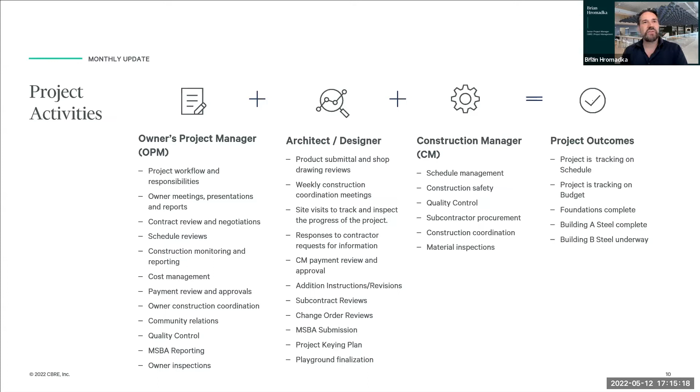We also have another MSBA submission that's being put together. That'll be the final one, so that'll be coming up pretty soon. And the CM is busy managing all the things on site, as well as a lot of material inspections lately. So together, we're able to make this thing go forward and keep the project on schedule and on budget.

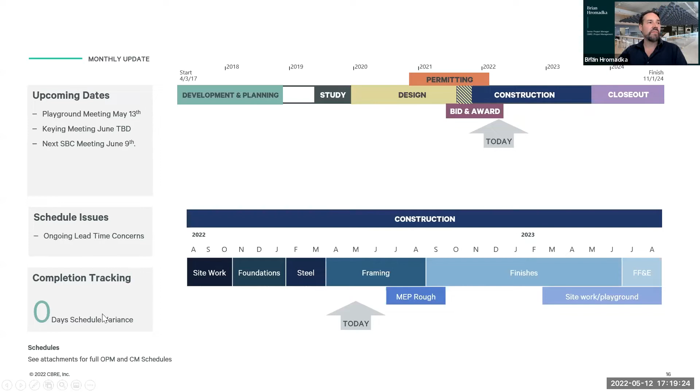So OPM, like I said, there's not really much new. We're going to continue to give you these summaries in the report because it's nice to be able to pass those on to other people as needed within the community. If someone has a question about what's going on, you can just hand over that whole report. But the OPM is basically working on the overall management, also communicating with the neighbors. There's some more communication that's been going out recently for some upcoming events, which we'll talk about in a little bit.

So we did have a concrete pour last month. That was, I believe, our second or third, but that also went off without a hitch. Notifications were sent out via email and flyers, and they're also being posted on the school's website, which I think is very helpful. You can see a banner on top. If you click on that banner, it'll give you the updates.

So within the next month, we're going to have a few more activities that people should be aware of. One of them is that temporary construction lights are going to be installed, probably the middle of this month, so here in the next week or so. This is necessary to provide the required lighting for the workers now that we have all the decking in and there's more finer work that needs to get done.

So OSHA has requirements for the amount of light that's necessary for the workers in order to be able to work safely. And then some of those lights will remain operational once work completes in order to keep the building secure and safe. But we have been able to work together with the contractors to reduce the amount of lighting during off hours.

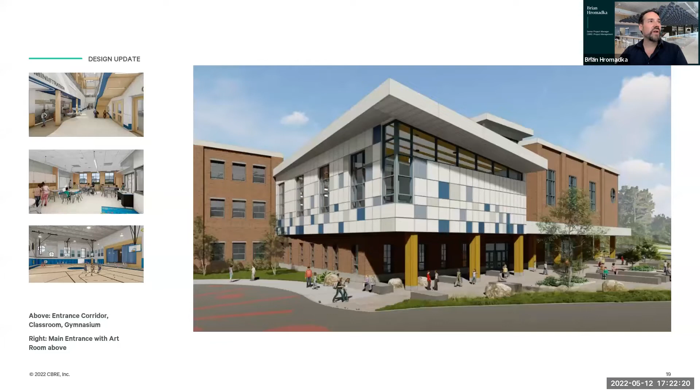Okay, moving on to our designer. The design team, as I mentioned, has been very busy with all the submittal reviews and also answering the RFIs. Brad was able to get away for a little R&R, which was very important because he's been burning the midnight oil, trying to get these turned around as quickly as possible to keep the project on schedule. And we have been able to kind of slowly catch up with the flow of new submittals and RFIs that are being put forth.

So before I move on here, I guess one thing I wanted to bring up is that we had a proprietary item for the safety glazing, and we have a substitution on that came from the contractor. I'm going to let Michelle talk about that a little bit more, but we did make a change there. It's not really going to affect the performance of the project, but I'll have Michelle explain why we made that change from the proprietary item that we had previously approved to the substitution.

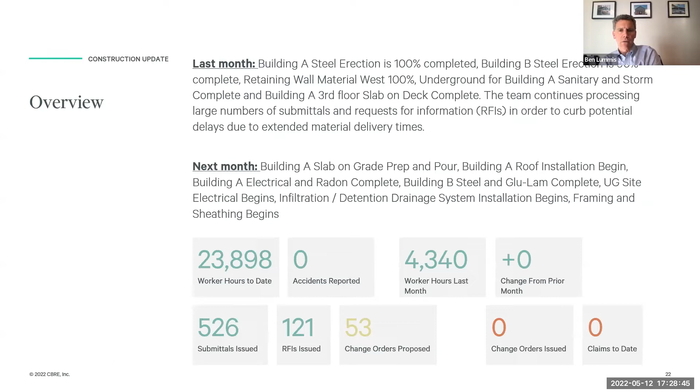Other questions about that switch for anybody? Okay, not seeing any. Thank you.

Okay, Amy is here, I believe. So we can go back to our votes. Sure, I'm sorry I'm going in and out. Can you hear me? Yes, we can hear you. All right, I'm going to mute so you don't hear me when I'm not speaking.

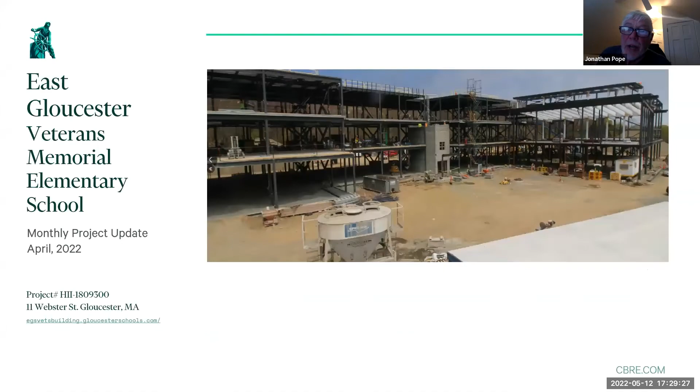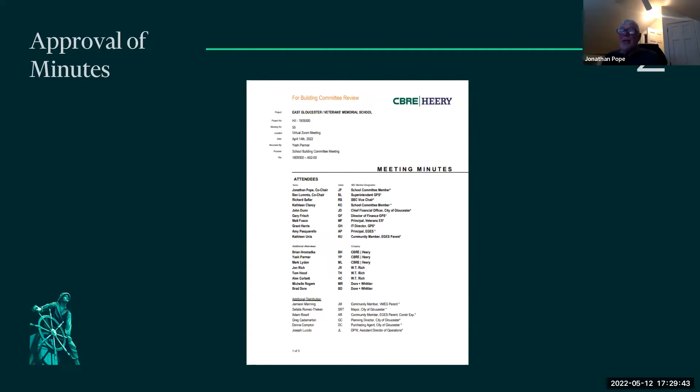Okay, so let's go back to... well, we never voted the minutes. Yeah, meeting minutes. Amy, we put out a vote for the meeting minutes and asked if there were any corrections or omissions, and we started the vote, but then realized you had disappeared. So how do you vote on approval of the April 14th meeting minutes? I vote to approve. Okay, thank you, it passes unanimously.

So we can go on to the invoices now, Brian, if you'd like. Thank you. Yeah, we have a total of 5 invoices this month for a total of just over $2 million. There are 2 of them from UTS, one of them from the previous month that was delayed. And then we have W.T. Rich, Dore + Whittier, and CBRE. Let me pull those up so we can go through those, and that link if you want to use the presentation.

Too many screens. Okay, can you see my screen now? Mm-hmm, great.

Okay, we'll cycle through these. Here's our invoice for WT Rich for a total of $2,082,959, for all the work performed in April. It's a little less than the previous one, which sometimes happens even though work's been ramping up, depending on when the subs submit their invoices. This invoice has been reviewed by our office as well as the architect's office, and we are recommending approval of it.

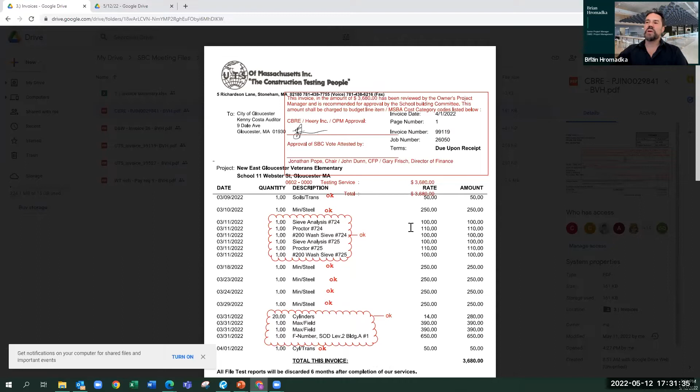Here's one of the invoices for UTS, in the amount of $4,346, and here's the second one in the amount of $3,680. Both of these invoices are for inspections being performed on behalf of the owner for steel and concrete work that's been going on.

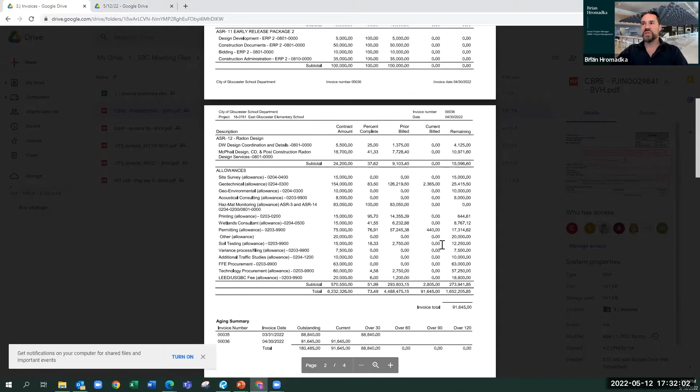Dore + Whittier's invoice this month is for $91,645. That covers their work on contract administration. There's also some geotechnical work where the engineer was out on site reviewing samples. And there was an invoice passed on for permitting from back in the fall, but they just received the invoice from their sub, so that one is included for $440.

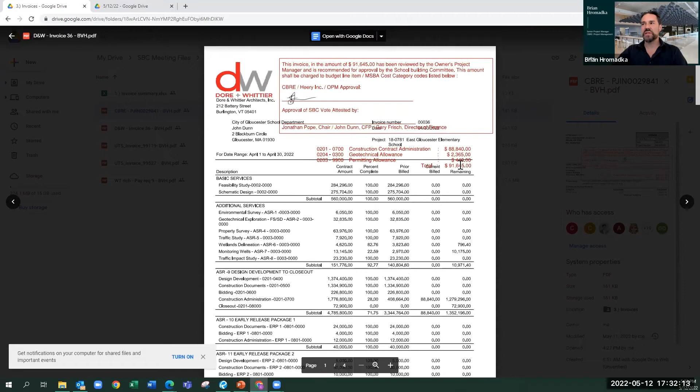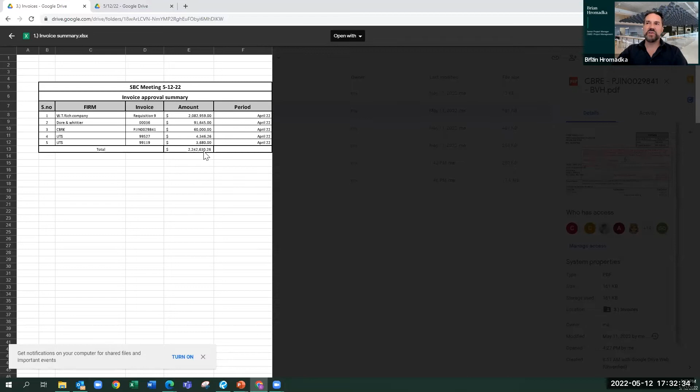For CBRE, we have our standard monthly billing of $60,000 for the past month's OPM services. So that's the total: 5 invoices totaling $2,242,630.26. We'd like to get a vote for approving those 5 invoices.

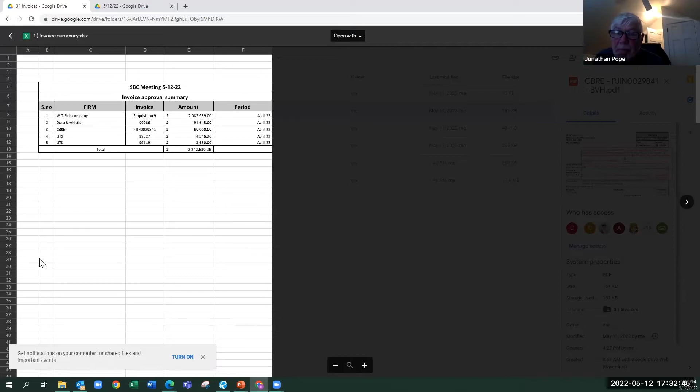Are there any questions before we make a motion? Okay, seeing none, I'll make a motion that we approve the 5 invoices as presented from WT Rich, Dore + Whittier, CBRE, and 2 from UTS, for the total amount of $2,242,630.26, and I so move. Second. Is there any discussion? Seeing none, Yash, can we have a roll call vote please?

Jonathan Pope, yes. Ben Lemes, yes. Richard Safar, yes. Katie Clancy, yes. Gary Fish, yes. Matthew Fusco, yes. Grant Harris, yes. Amy Pascarello, yes. Caitlin Nunes, yes. It passes unanimously.

So we can pay those bills. Is there anything else? Let's pick up here where we left off. Where were we? Okay, go back. So we talked about what the OPM and architect were doing.

And of course we want to know what the CM has been doing on site. Can you see the screen now? I think it's visible, right? Okay, one of the things I wanted to point out about the CM is that WT Rich takes safety on the site very seriously. I don't know if any of you were paying attention to the news lately — there have been a number of significant construction accidents in the region. I'm pleased to say that we have had no accidents on site.

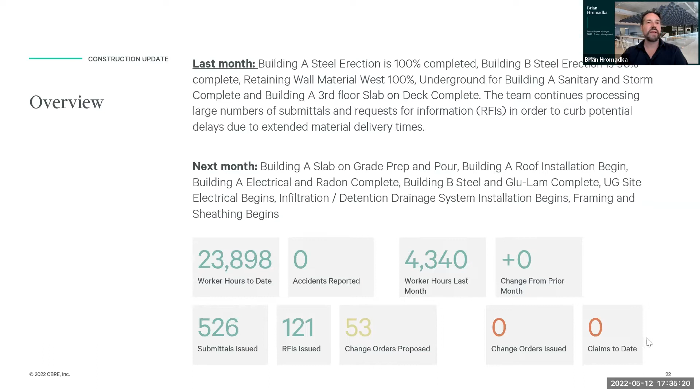Here you can see the milestone activities. So we have had some slip here on the steel. You can see in building A that was completed April 15th. But structural steel for building B, for substantial completion, is showing April 28th, so that's back on track. As I mentioned before, we expect that next month's project update will not be showing any delay at all.

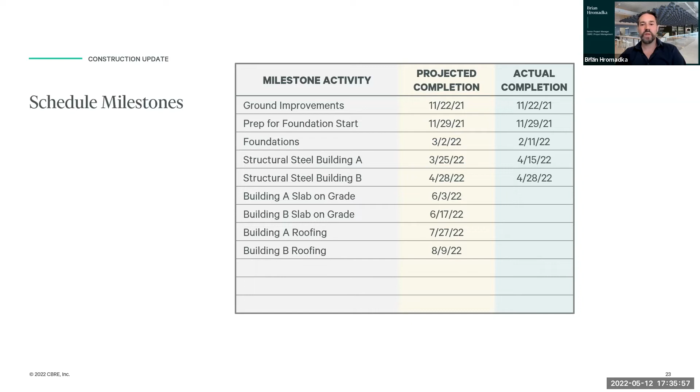So here's the schedule. Maybe someone from WT Rich can take us through what we're looking at now, and then we can take a look at the drone video as well. Or if you want to talk about it while we look at the drone, I can start that. Yeah, I'll give a quick update on where we stand with schedule. Hopefully you guys can hear me. So again, we shared this last month, just giving a general sense of progress as we move to substantial completion in June.

So obviously being in May, we've entered the halfway point of pouring concrete slabs. We've started, as Brian mentioned, the exterior building facade, getting some of the rough framing going and the installation of the MEPs. So actually, Brian, if you don't mind — John and I have got this new technology we want to try to roll out.

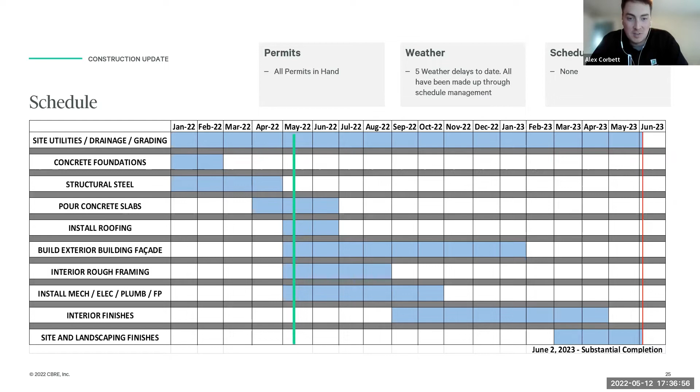Yeah, I don't know how it's going to go, but we're going to give it a shot instead of the drone video, because many of you have probably seen the exterior at this point. So we're going to try to get inside the building.

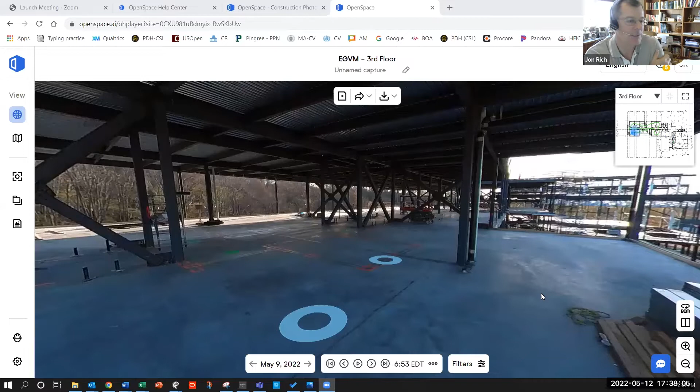Before we get into the narration, I just want to mention we just started using this tool called OpenSpace. Can you guys see my screen, picture of the building? Yes, okay. So OpenSpace is pretty cool - our project engineer or anyone else, they walk the site. They do this like twice a week. They have a 360 camera mounted on their hard hat, and they walk at a fairly slow pace through each floor, doing a 360 capture of the building. So it's really good data for a lot of reasons, quality control, we can go back in time and look at things. So you're kind of seeing it at a pretty early stage, but this is on the 3rd floor.

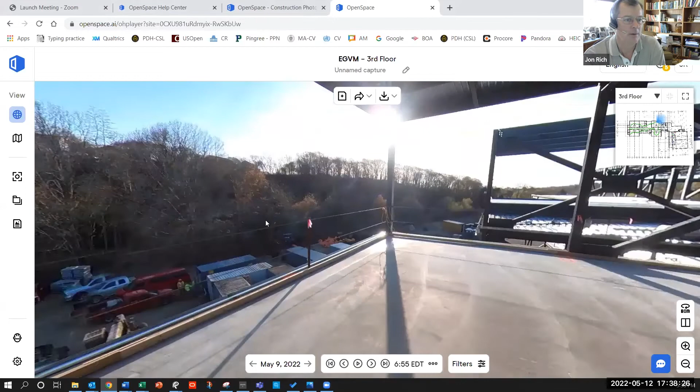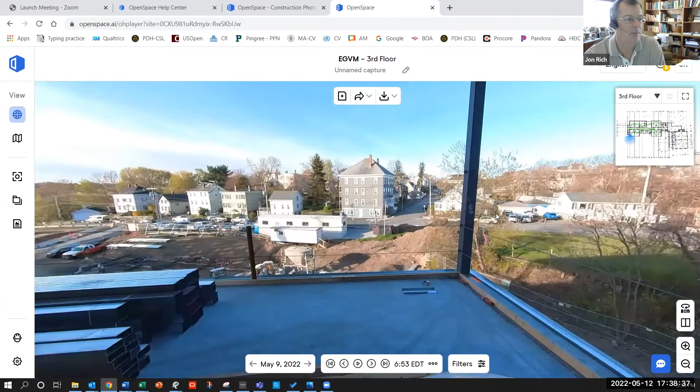You can actually see here, this is the path he walked. You can see I'm standing in this corner of the building right now, and I'm looking this way. I can jump to different parts of it if we want, but for this we'll just start back here where he started. Turn around - that's looking out that way, looking at the neighbors. These little discs are like capture points where you can jump to where you want to go next.

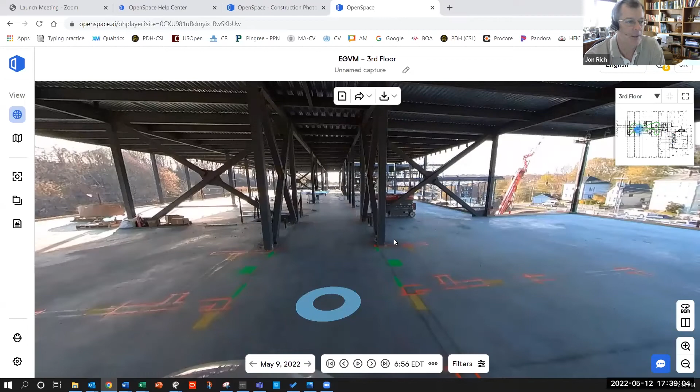Screen kind of turns dark, but not much going on in these floors. I'm gonna let Alex walk you through the floor, and he's gonna talk generally about what's going on as we go. So this is the 3rd floor, this is the west end of the building right here. Alex, you want to take it away, and I'll show whatever might be relevant.

Sure, so just to set the context for you guys, we're working with A building, 2nd floor, 3rd floor, down to 1st floor. We'll jump down to 2nd floor in a second, but we wanted to start at the top, top-down approach here. As Jon mentioned, this is the next step we're getting to in terms of getting our rough MEP stuff going. You can see a lot of the layout on the floor, which is essentially how these guys are going to frame the building.

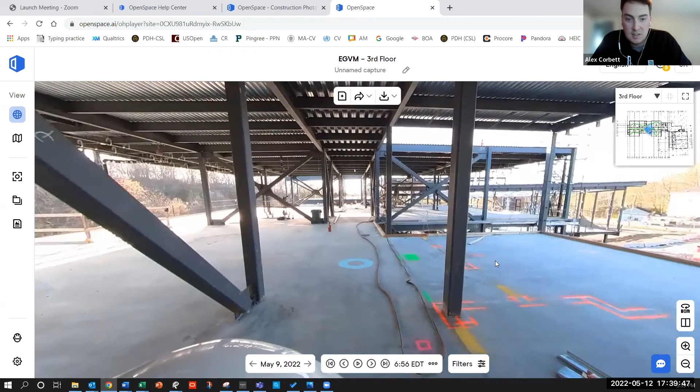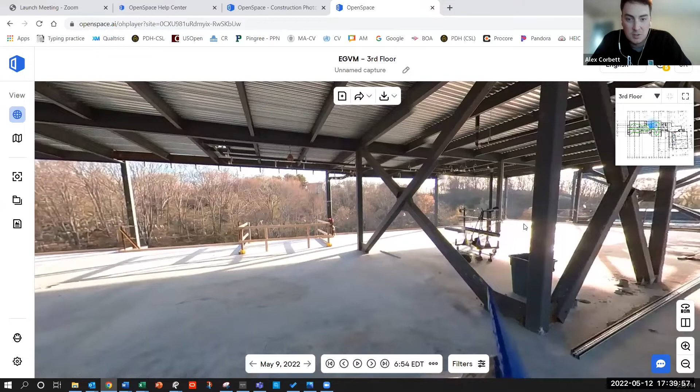They basically put marks on the ground, and then the framers will come and follow a step-by-step plan to getting the interior walls going. So you can kind of see the enormity of some of these classrooms, some of these spaces as they are, again, laid out on the floor and then eventually framed. Right here you're at the extended learning space, which basically goes steel to steel - it's a gigantic space. When we jump down to the 2nd floor in a second, you'll see a bit more of how those spaces are coming along.

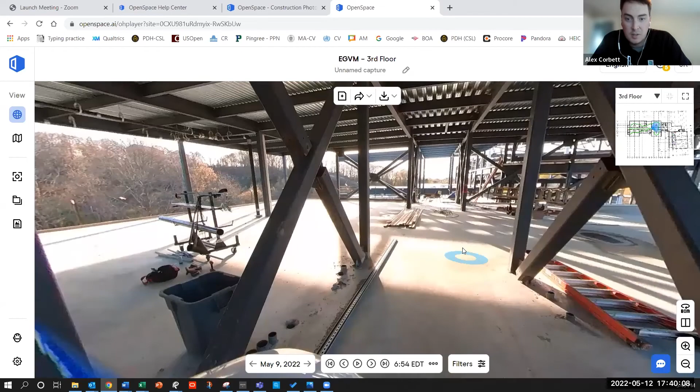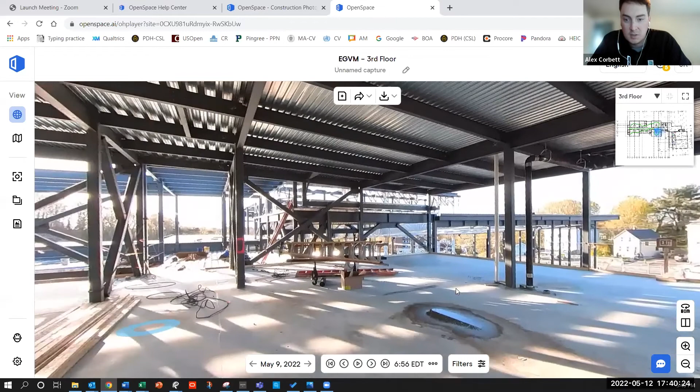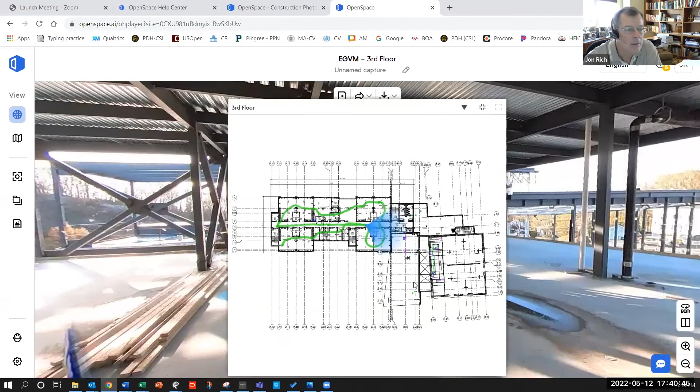So again, 3rd floor underway, getting a lot of the piping through up to the roof. You can see the white PVC pipe - that's actually part of our radon system that's carried down through the slab. You can see a lot of the rain leaders being installed as well, basically the roof drains being tied to the roof and dropped down to the slab and exiting the building. So we're looking from west to east, where B building will eventually be, kind of the end of the corridor of A building. We didn't do a walk in this area yet because it's all just deck and not turned over to us yet.

All right, I want to jump down to the 2nd floor. Sure.

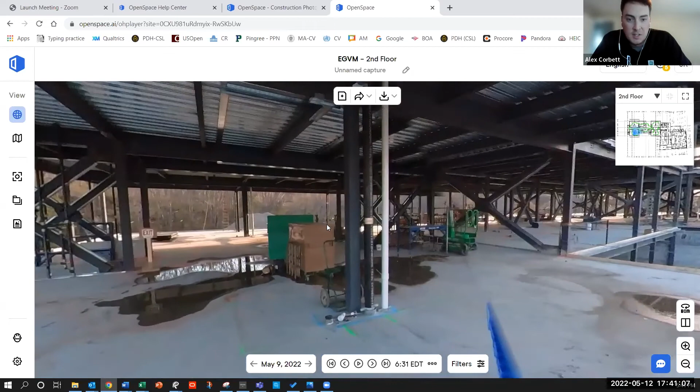Okay, let's start over here. Kind of the same corner we were before. John, if you want to just rotate, you can see the stairwells. They should be built up to a point just below it, so you can see the hydromobiles that are there for the masonry stairs.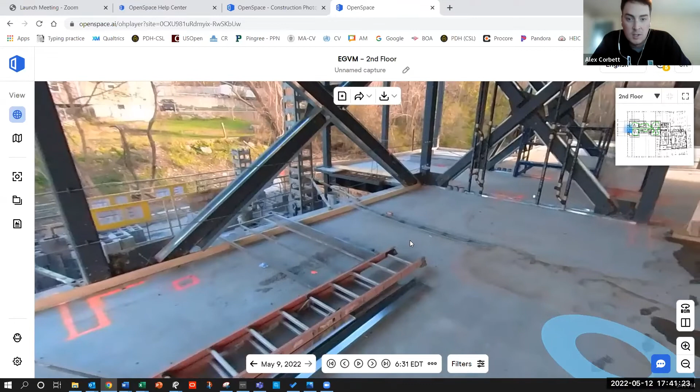Actually, as of today, this was taken on May 9th. As of today, they've surpassed the 2nd floor with their masonry block. So at this point, they're working their way up from 1st floor to 2nd floor, but you can start to see more of the piping through, actually making the connections with the vents and whatnot.

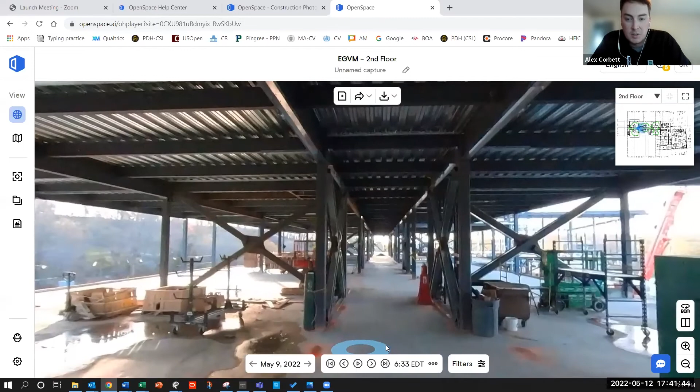A little bit more layout on the ground. You can see the top tracks, which is how they start their framing. They have a lot of the top track installed at this point. We typically like to keep some of the bottom track off so our lifts can move and not damage the stud framing as it gets installed. So they start with the top track and then they'll start putting studs up as well.

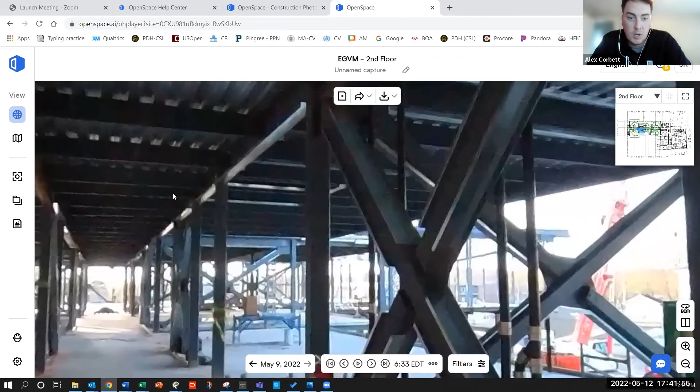So again, this is looking west to east down the corridor of the 2nd floor A building. You can see the brace frames, which get enclosed framing as well. That's part of the structural integrity of the building. A lot of the cores in the floor as well, which will get used by various piping making its way from the 1st floor to the 2nd floor.

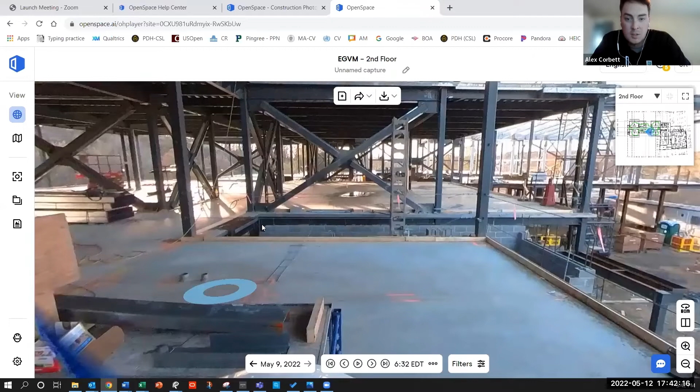So again, that's another stairwell right in front of us. They're creeping up from 1st floor to 2nd floor. You can see another one of the stanchions for the hydromobile. So I believe that's stair 2, number 2.

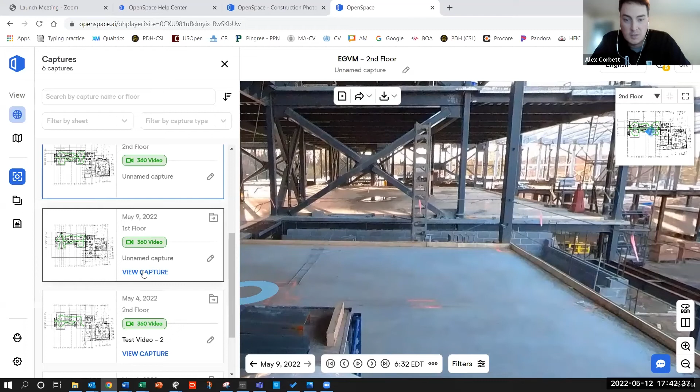But yeah, progress is going great on the second floor. I think as Brian mentioned, we've gotten studs on site as of Wednesday. So you'll start to see as you drive past this building, the building getting closed in with exterior framing. We're down on the first floor, obviously, at this point.

As we've mentioned before, a lot of the underground MEP stuff below the slab's been installed at this point. All those rain leaders are tied in through the slab and exiting the building. So you can see that stair 1 shaft being built.

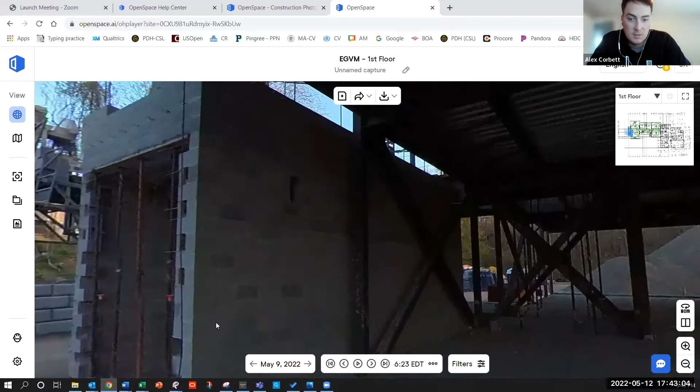You don't see a lot of stuff on the ground because it's all been covered by crushed stone. So we're actually in really good shape. And as Brian may have mentioned, we're preparing - actually next week we'll start getting the rebar in, a lot of the mesh as well, preparing to pour the slab on grade, which I believe May 26th is our target date. So we're in really good shape there.

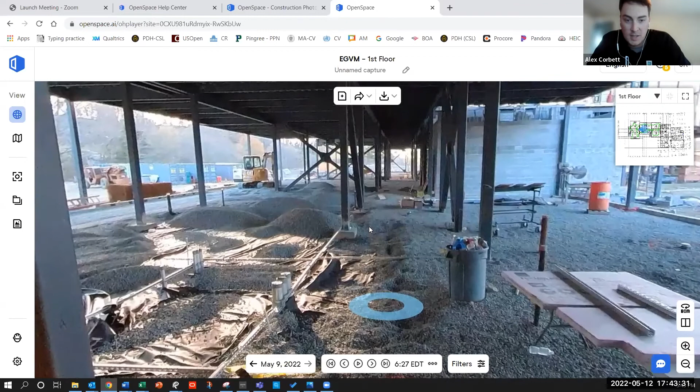You can see some of the guts, if you want to call it, under the slab there. That's the electrical room, which has some of the larger feeders, feeding that space as a secondary electric room in A building. You can see the stair 2 shaft as well.

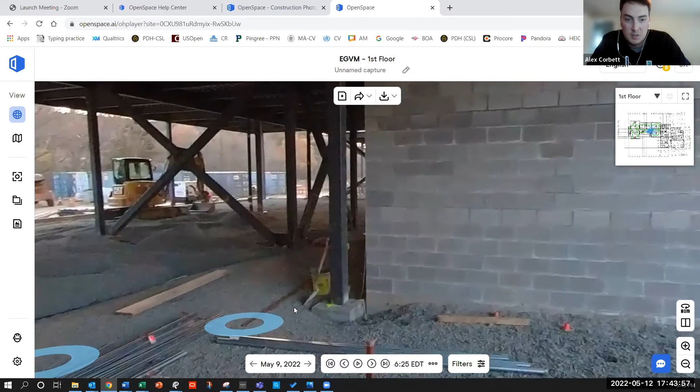So yeah, it's pretty amazing to see - this was 3 days ago, and if we were to go to today, just the amount of progress that's taken place since. We typically do these OpenSpace shots twice a week. So if we did this on May 9th, we'll probably do one either tomorrow or the beginning of next week, depending on how many we've done so far.

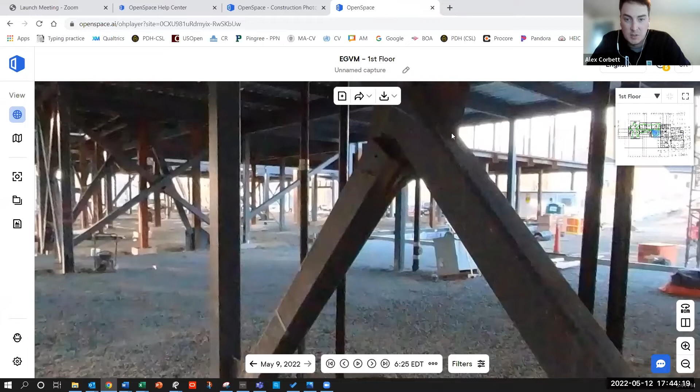So we wanted to give you guys some insight into the interior of the building, since most of you have seen the shape of the exterior with the drone video and whatnot at this point. So I'd be happy to answer any questions you guys may have.

Just one thing I'm going to point out, as the OPM looking at this, it's pretty impressive because a picture's worth at least 1,000 words. But also, by having this level of detail being shared with the committee and the public - WT Rich, generally, because I've worked with them on a number of projects, keeps a pretty clean, orderly site. I would think that by having this technology, it's going to even increase the likelihood that things will be kept neat, clean, and orderly, which helps with safety and the overall production of the project. When people see this, they'll really appreciate all the work that's going on and see the difference between what we'll see next time versus this time. You'll be able to see the incredible amount of work that gets put in place by maybe 100 or so workers each day.

Maybe not 100, yeah, not 100 yet. I would just say also, Mark, this OpenSpace tool is great for doing little virtual tours of where we're at now.

But the data is very sophisticated, so you can do split screen and it'll match up and line up the shots. If you have a current shot and want to look at that exact view from a previous walk a week ago, two weeks ago, three weeks ago, you can put them side by side and see differences. You can also, when you're further along, use an X-ray mode - even though the current state might have the walls all enclosed, because you've done past captures, you can see what that wall would look like if we stripped off the drywall, or before we did the MEPs or the insulation. You can go back in time and check out blocking and things like that.

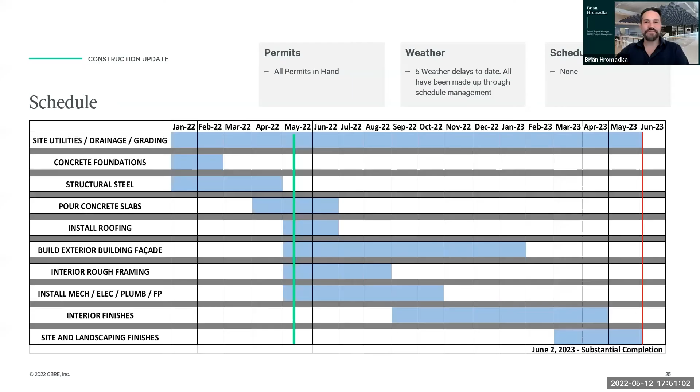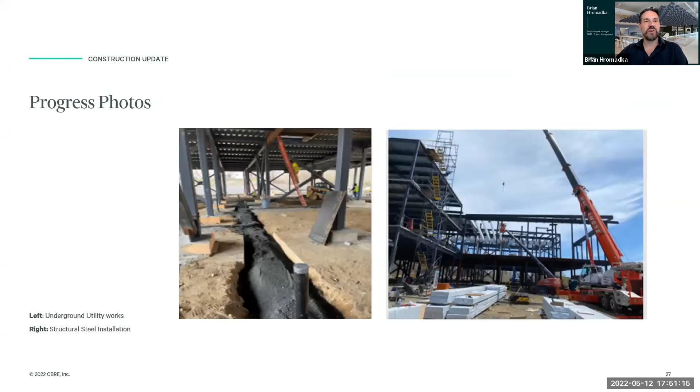Landscape, you can see boulders. This is where we left off with the schedule, so we won't play the drone video since we got good coverage there. We had some interior shots—again, you have these with you, so you can pass them around. But I think what John presented was a little more exciting than this. Here you can see the retaining wall that's complete out there.

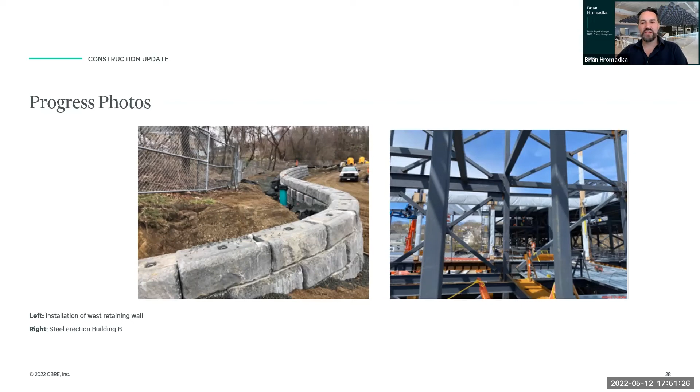Okay, a few more things we wanted to cover. Landscape boulders—we made the decision to bring in some landscape boulders to the front of the building. This was something that was originally cut out of the project, but we had an opportunity. Dennis had noticed when we were excavating that we've got all these big boulders, and maybe we could reuse some of them. So we pursued that together with W.T. Rich and with Dore & Whittier, talking with the landscape architect.

The landscape architect came out and identified a number of boulders that would be appropriate for what you see here in the picture. So we no longer have these granite benches—those had to be cut out, but now we can put these boulders back in. I think that'll add a very nice visual interest to the front of the building, also give the kids something to lean up against, and overall enhance the landscape.

And the good news here is that the cost to bring in new boulders, which is what we originally had in the project, was about $100,000. So by being able to salvage these boulders to use at the front of the building, we were able to save money in two ways. One, we cut down on the cost of having to remove those boulders, because otherwise they would have to be jackhammered apart and then hauled off site. And then, of course, we didn't have to pay for new boulders. So overall, we saved about $70,000 on this $100,000 item.

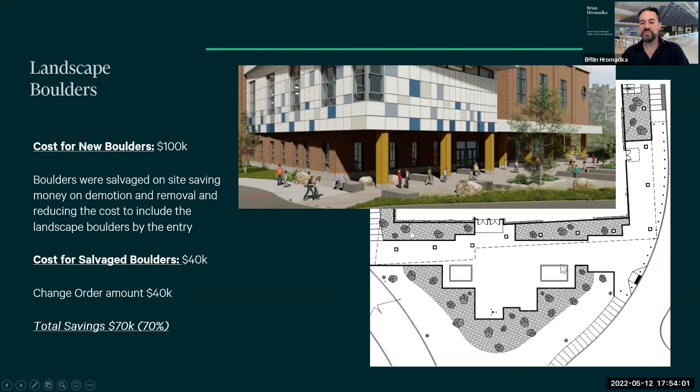One similar item with some additional cost to the project, but providing an incredible amount of savings overall, was adding some additional conduit for future electric vehicle chargers. We've all seen more and more electric vehicles as we drive around our area. We have 2 vehicle chargers, which you can see here on the plan, that are currently part of the project, and we could accommodate a total of 6—so 4 more—with the current conduit. But because of where we are right now in the project, the cost to add that conduit is quite minimal, around $2,000 to $3,000.

Whereas if we were to do this after the project was completed, we'd be looking at about $20,000. So by going ahead with this now, the timing is key, because if we miss it now, we miss that opportunity. We can get the necessary conduit in place so the project could accommodate up to 12 electric vehicle chargers, saving about 85% of the cost. That would be a change order of about $3,000, but with those 2 things combined, we feel like we can still be responsible in handling the budget and execute those 2 changes.

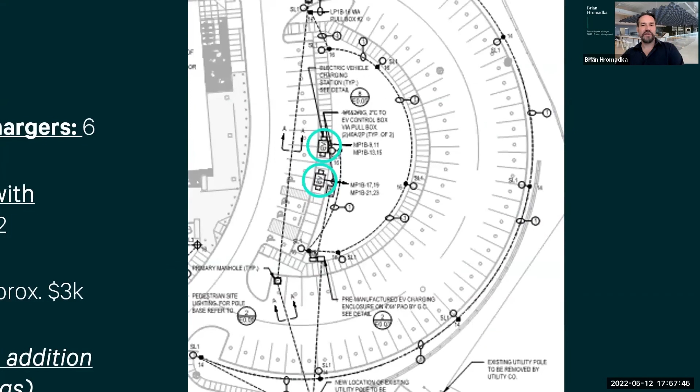I guess the question is, the EV chargers, we're installing 2 of them, got that. And those are staff parking, visitor parking - they could be either or. What's the intention there, do you think?

I actually don't know what the signage is yet. I don't know if we figured out exactly which ones are going to be staff and which are going to be visitor - that's something that could still be figured out. But we do have 2 available that could be used for either purpose. With both the existing and the new, we can have up to 12 chargers. So if the city wants to put more electrical vehicle chargers on site, we could accommodate more, so you could have some for staff and visitors that are separate.

I really like the idea of adding them, especially now since it's less expensive - you put them in there and they're there for when we need them in the future. I guess what I was thinking is, there's a whole bank of parking spaces in the front dedicated to electrical vehicles and no one's using them. But if I think through it, we actually don't install those additional chargers until there's real demand for them and we've gone electrical vehicles in a major way. Is that more of the thinking?

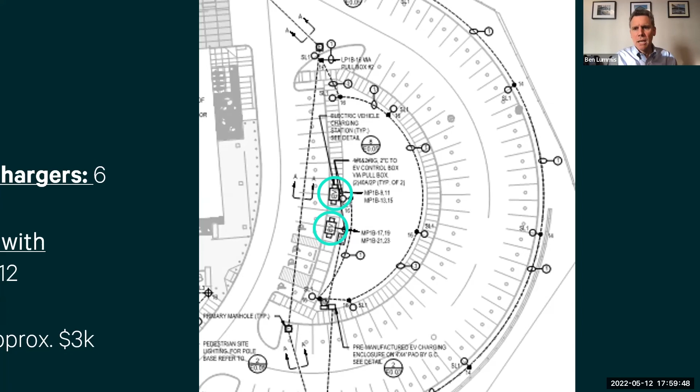Maybe I'm just in the weeds here, but I can give you a couple thoughts. So, just so everybody understands, those 2 chargers are actually 4 stations - it's two per charger, so you have 4. The idea was to go and just put in that initial infrastructure, that underground infrastructure, that gives you the flexibility to do some of that later.

There's more work that'll have to get figured out with the utility company, because depending on how many get installed, there may be a need for a transformer there - they do need to be connected, so to speak. But I think the important part is to at least have, at a fairly low cost, the ability to put that infrastructure in now versus later. Then, at the point in time when it's the appropriate time to pull that trigger, you're able to do so without having to rip everything up and replace it. So there's more work to be done here, but for fairly low cost, you can save yourself a lot of money going forward. That's really the intent here.

I have to point out, it was Brad, I think, who mentioned this first, that it would be a good thing to add into the project at this time. So he was thinking ahead. I don't know if you have plans to get an electric vehicle, Brad, but I don't know if they make big trucks like that now, maybe in a few years. There's always hope, Brian. There's always hope.

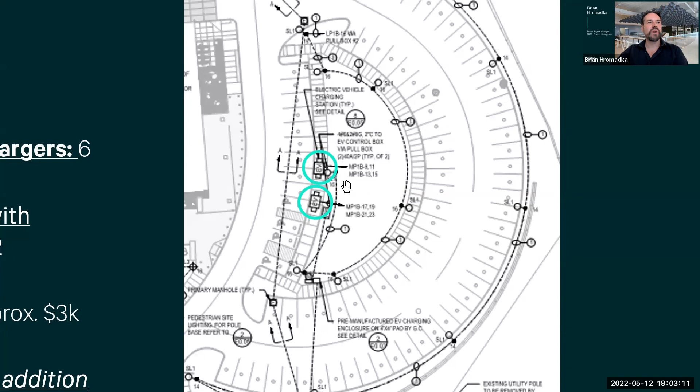Well, you do have all these parking spaces here, which is not much further distance to get, and this is, I think, a landscaped area. Yeah, so that's something I think that probably could be accommodated, without having to go all the way around to these spots. It's a good question. Maybe instead of having them all right up close to the building, we can take this second set that we're talking about for the future and maybe do them on the right side of that detention area. Yeah, I think that's exactly the way Kathy and I were thinking.

I love electric vehicles, I would like to get one someday, but that doesn't necessarily mean I get premium parking reserved for me everywhere I go, right? But we want to have them available, we definitely want to have them available, we want to build infrastructure to have more as the future goes along. Absolutely. So let's take a look at that, and then maybe we can report back to you guys. Conduit's relatively inexpensive, so let's take a little look at that and see what we can come up with. I think it should be premium parking for people with electric vehicles, just for the fancy point. Very biased, really biased.